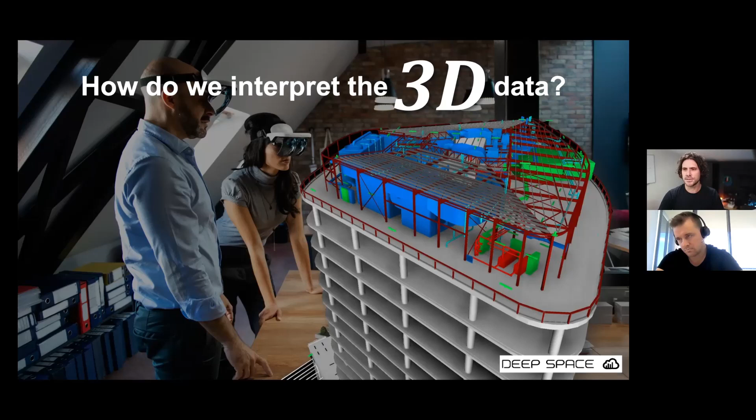And if anyone's ever used Revizto before, they'd know that we can't get rid of the drawings yet. And I don't think drawings are ever going to go away, because there's so much information on the drawings that isn't in the model or isn't visible in the model. It's fine to walk around the model, but you can't get everything from it. So they're two sides of the same coin, right? We know that. But there's this other equation that we don't get quite right.

How do we interpret the I in BIM? What does the I look like? We know what 2D looks like, we know what 3D looks like - what about all the data? You can look at a drawing, you can walk through a model, but how do I view the data? How do I read the information? How do I write this information? How does the industry interpret this new language? It is new, and we find it hard to read.

And we go to a building site, and the coordinator there sits us down in a chair and says, we've got these models - what's in there? What do we do with it? We have this BIM project, we don't know what to do with it, we don't know what it means. So how do we interpret BIM?

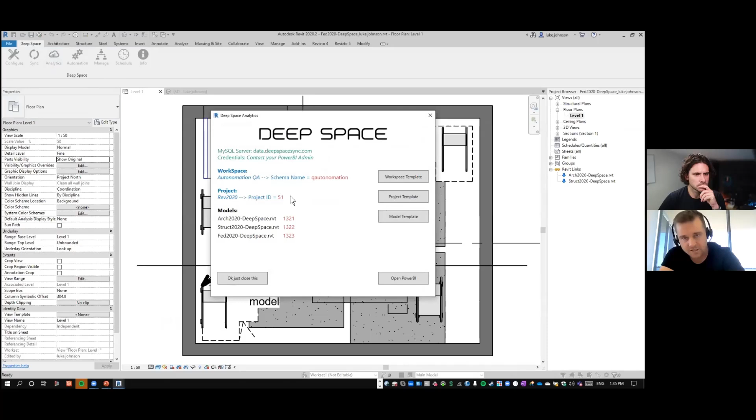I'll give you a real quick look at what that looks like. Here we are in Revit 2020, and we've got our plugin here in the ribbon. This model, this data set, has already been connected up to the Deep Space cloud. We can click on the analytics button, and it gives us a dialog showing where your data is living, and all the key IDs to call up your information in Power BI or some other analytics environment. We can configure the connection between this model and the cloud, and we can sync.

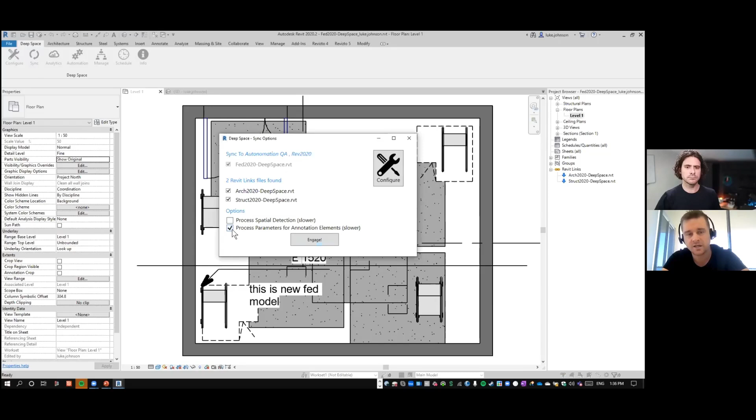If we go to sync, it opens up this dialog where we can say, I want to publish the federated model, the architecture, the structure. We've got some options about data we want to capture or not, and even this was a bit of learning over time, what was too much for most people in terms of data. For example, maybe you don't want to collect every single parameter on every single piece of text in the model. And that is really it. We can now just hit engage, and the plugin is ripping data out of all those models, publishing it to the cloud into a structured environment, and we can go away and analyze that.

And we could do things like this, of course, data auditing and rectification. We built things like a uniformat mapping tool where we could just quickly run scripts and automate all the classification of elements. We built some customized interfaces for the client.

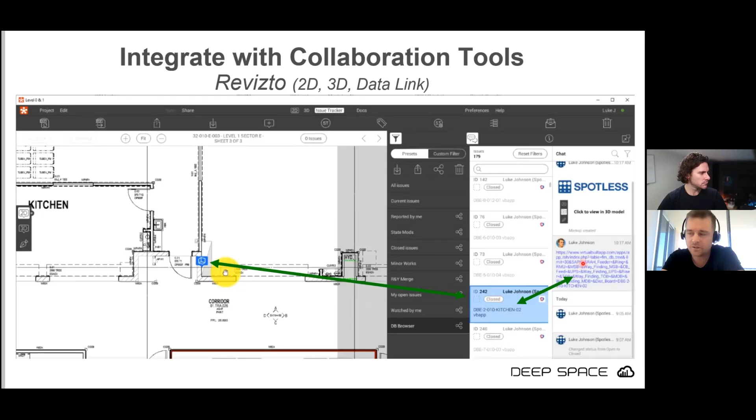In this particular example, we brought in data that they had about their electrical systems, linked it all together to the Revit information and to Revizto, and ended up with something like this, where inside the Revizto environment, we could jump into a particular element, and we could also jump back out into the database. So we had kind of a three-way linkage operational, between data, the 3D model, and the collaboration tool. A little bit like what Michael was talking about before, that Rosetta Stone, where we could now get everything talking to each other in a way we hadn't been able to in the past.

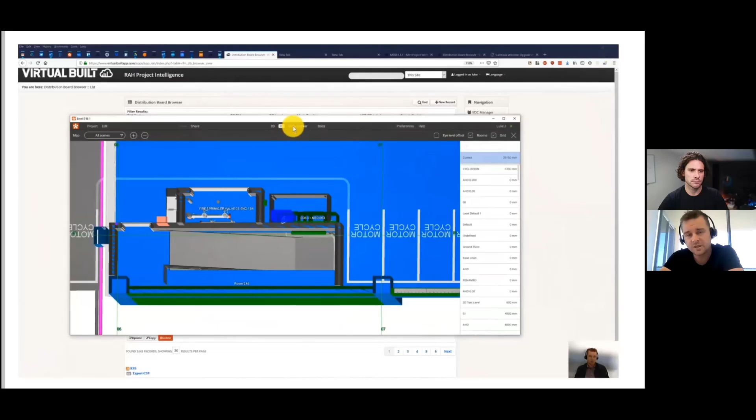I think this is a short video here of that. Basically, inside of our front end, browsing through this data that the client has put together in Excel, clicking a hyperlink there, which is launching us straight into Revizto, reviewing some of the context of that element inside Revizto. And then when I want to jump back into the database, I can just click on the hyperlink there, and that puts me straight back into that element, inside the database. So we had that, bi-directional linkage operational.

Just some lessons, particularly from the operations side, which I'm sure many of you are already learning as well, is you need to have a clear standard in terms of what you're going to hand over at operations time in your data, and you need to be able to validate that. And that's, I think, a key thing, is the validation of those handovers is traditionally very difficult. Even if you're doing it in some kind of Excel setup, maybe exporting Revit schedules, parameters are called different things.

Parameter IDs are changing, and it's just too difficult to manage with an export file situation. We need to get that data into a relational database, into a data platform.

Once we've got it in that platform, we can validate and audit, and we can enforce the rectification. We can either issue reports saying you didn't meet the project requirements, or in some situations we take ownership of those models and automate the injection of data to fix the problem for people.